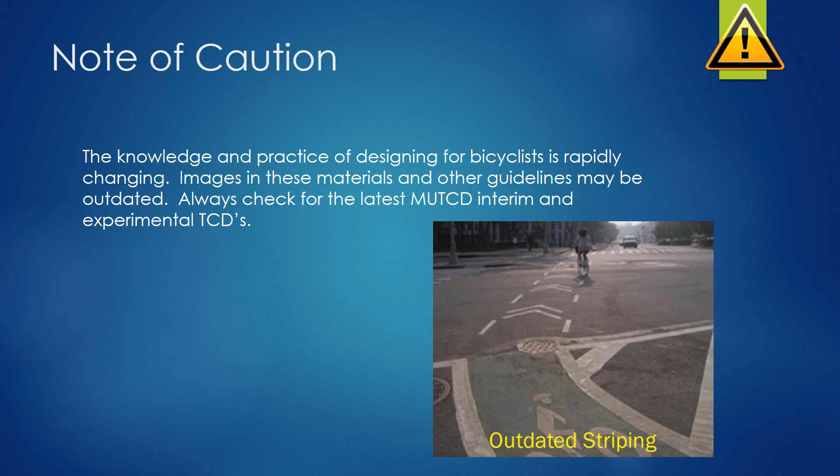I also want to remind you of some of the concepts that we discussed in our previous webinars. These key safety factors for designing for bicyclist safety: speed, number of lanes, visibility, the type of traffic, how much traffic there is, how many large trucks are traveling on that roadway, where the conflict points are, how close the bicyclist is to moving motor vehicles, the pavement condition, how well the bicyclists control the vehicle, or even if there's grade or turning maneuvers that might make it difficult for a bicyclist to maintain control, and connectivity of an overall network. And many of these factors are going to be very critical to designing for bicyclists at intersections.

Certainly, if we can reduce speed, that reduces the risk of a severe crash. Number of lanes makes an intersection very complicated for a bicyclist to maneuver through. Visibility is probably where we have the most opportunity in terms of countermeasures, trying to make the bicyclist more conspicuous to motorists and trying to make those conflict points more conspicuous. And certainly conflict points at intersections are a key concern.

We're going to start off with what you might not usually think of as an intersection, but a shared use path crossing of a street would be a form of intersection. And we want to be thinking about pedestrians and bicyclists at these locations.

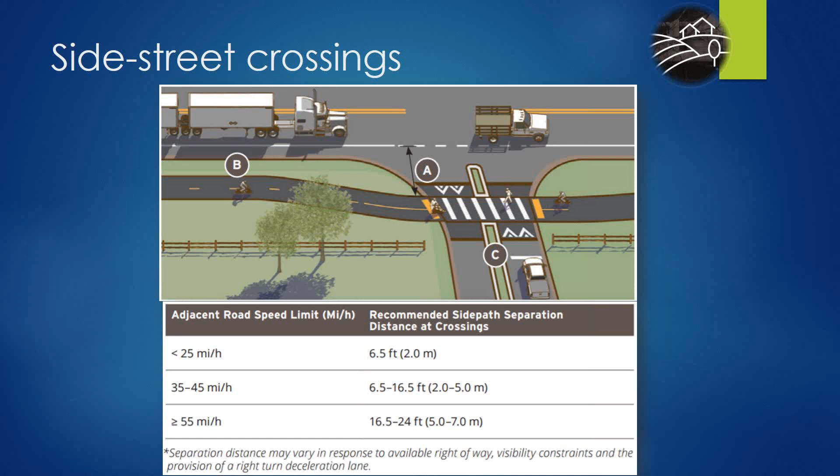So in terms of designing a shared use path crossing, there's a cycle we go through. First, we look at the geometric alignment and terrain considerations. Is it a 90-degree crossing? Is it skewed? Are there grades we have to contend with? What can we do to improve that?

Then there's the roadway characteristics: how many lanes, what are the speeds, what are the volumes. And then we want to check the sight triangles, the visibility. A bicyclist will be approaching that crossing anywhere from 10 to 20 miles per hour, or slower if they're yielding or looking for traffic. So we want to carefully consider the sight triangle for both pedestrians and bicyclists.

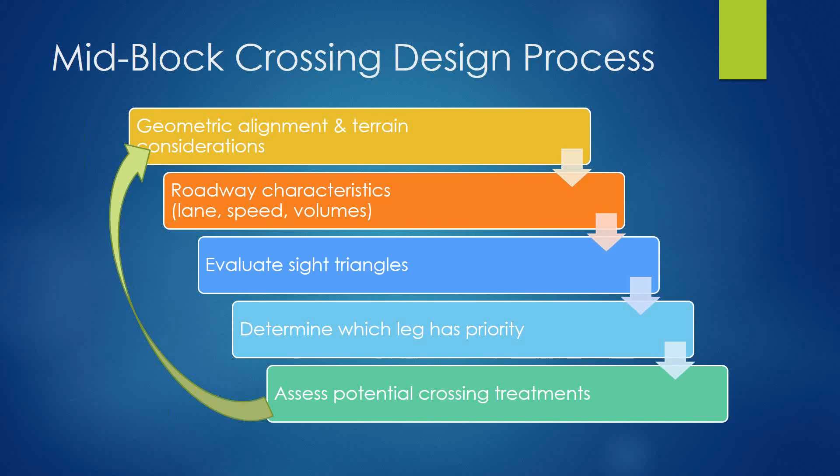At that point, we determine which leg of the intersection, or whether the shared use path or the street, is yielding at this crossing. Then we can look at potential treatments to enhance the safety and visibility of that crossing, and we might iterate through this process a couple of times, going back and forth to refine our design.

Here's one example using yield signs. You could do a similar layout with stop signs, but here we have the path yielding to the roadway, with an advance warning sign for the bicyclist that they should yield ahead, and a yield sign. I'll also point out they have a street name sign. Very often we forget about putting street name signs for bicyclists on a shared use path, or street name signs giving information in both directions even though the street might be one way, because pedestrians and bicyclists might be traveling opposite to motor vehicle traffic.

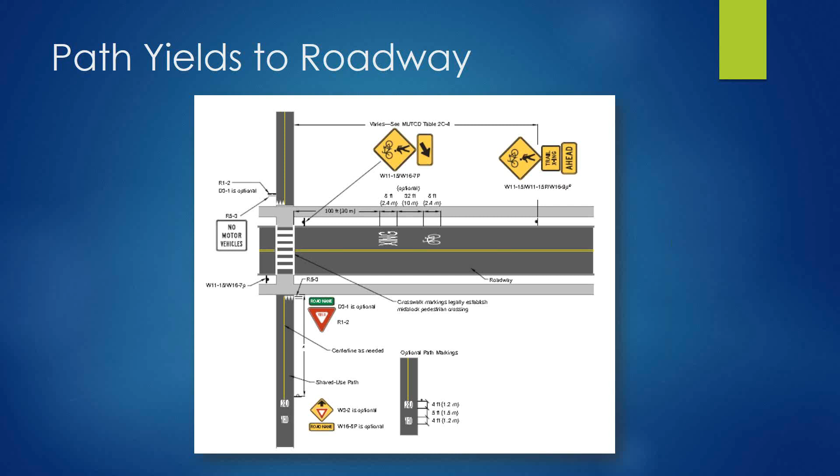So street name signs are important. And then you notice on the roadway, we have a warning for the pedestrian crossing ahead, or the shared use path crossing ahead, and then there's a shared use crossing sign right at the crosswalk.

Alternatively, if we're asking motorists to yield to pedestrians and bicyclists, we can have the yield warning ahead sign, the yield sign at the intersection, the shark's teeth, or we could have a stop sign and a stop bar. And for the bicyclists, we have a warning sign indicating a crossing ahead, so they might choose to slow down and be cautious to make sure motorists are truly yielding for them.

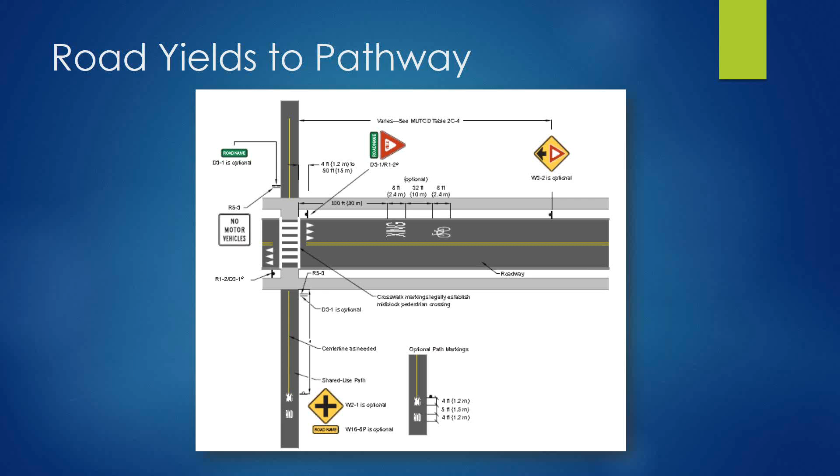Once we've figured out who's yielding to whom, the geometry, and the sight triangles, we can look at additional countermeasures to improve safety, like the advanced warning signs and stop bars we've mentioned. If we have multiple lanes approaching the crossing, we probably want an advanced stop bar instead of placing it immediately at the crosswalk, because this allows the bicyclist or pedestrian to better see that both lanes of traffic have yielded or stopped, rather than having the first car stopped and blocking their view of what's happening in the adjacent lane.

We can also have a raised crossing, or add some beacons or lights to improve the yielding behavior, like a rectangular rapid flashing beacon or a pedestrian hybrid beacon.

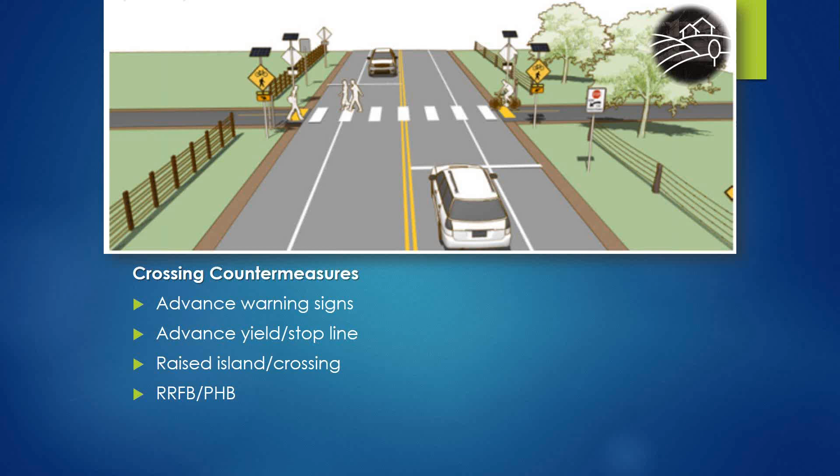So here's an example again from the Small Towns and Rural Multimodal Network Guide, where they've used a raised crossing. They've put some warning signs, and they're asking motorists to yield to the people using the trail.

There might be some things you'd want to refine if you were trying this in your own location, some things we've learned from this installation. But this is a good example of taking traffic control devices we already have and refining them to improve the situation for a bicyclist.

Let's move on to what we typically think of as an intersection and how we might think about bicyclists at those intersections. When I started my career as a designer, I am saddened to admit that my consideration of pedestrians and bicyclists was very limited.

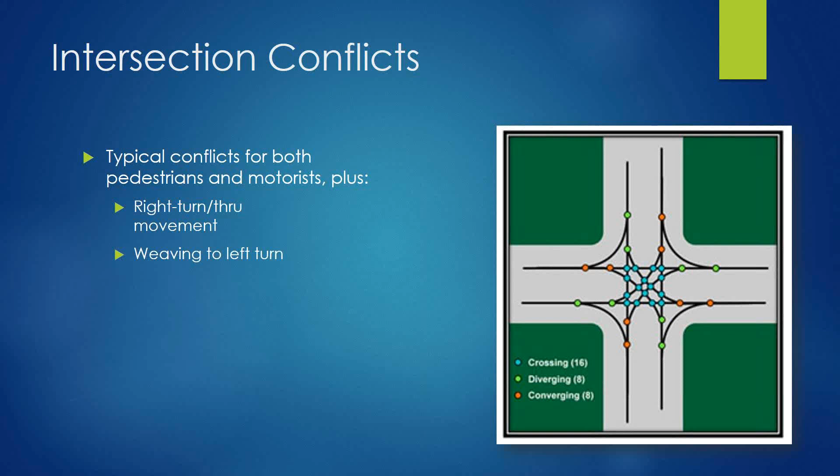We have something like 32 conflict points at a typical intersection for motor vehicles, and then there's all the conflict points that pedestrians experience. Well, bicyclists have all of the conflict points of a motorist and of a pedestrian, as well as 2 additional conflict points, the right turn through movement conflict and the weaving to a left turn conflict.

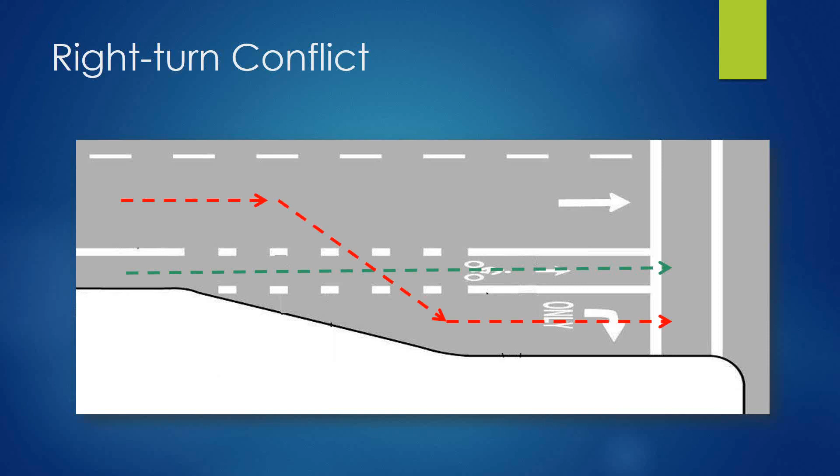So here we have a typical intersection with an auxiliary right turn lane, and the bicyclist would be traveling straight through the intersection. And if there's a motor vehicle approaching, they are crossing the path of the bicyclist, or the bicyclist is crossing the path of the motorist, creating that right turn conflict point.

In this case, we have, as I think you refer to them in Florida, a keyway, where the bicyclist has space between the right turn and the through movement motor vehicle lanes. And that should simplify the maneuvers, where the motorist is crossing the bike lane and looking at that conflict at a time that's separate from when they are looking for gaps in traffic and making a right turn maneuver.

And so this is certainly a preferred layout for that right turn conflict, but we don't always have the space available to us, and or we might have some other type of intersection arrangements where it's more difficult to accommodate bicyclists.

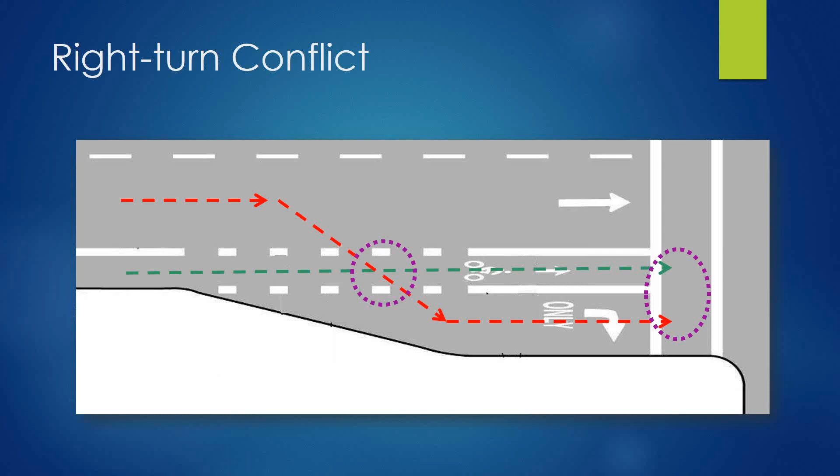So I want you to be thinking like a bicyclist when you look at your intersection designs. Put yourself on their pedals, so to speak, and ask yourself, would you dare, or would you allow your children to travel through an intersection on a bicycle the way that you have accommodated them?

Here we've got a young lady who is approaching an intersection. The motor vehicle lane that's closest to her is going to become a right turn only lane at the intersection. So at some point, she has to merge across that right turn lane to get over into or near the through lane. As she's approaching the intersection, she looks over her left shoulder, trying to find gaps in traffic. Fortunately, there's no one approaching in that right turn lane because the traffic is moving pretty rapidly on this corridor, running at about 40, 45 miles per hour.

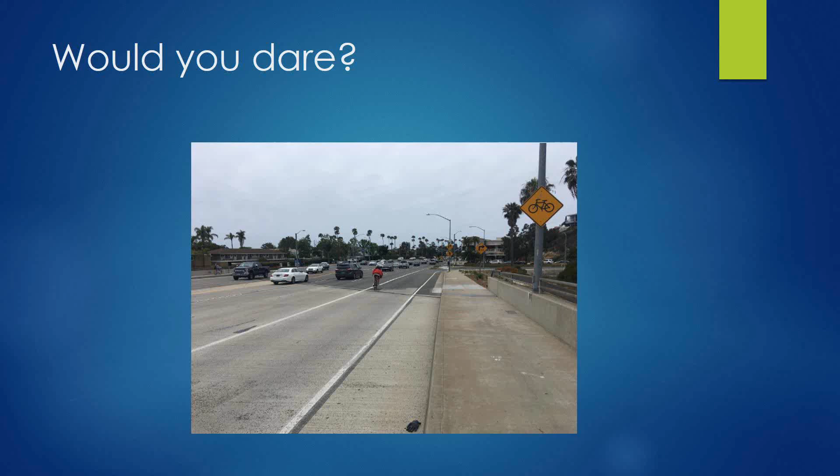So if we want to think about providing safer intersections for bicyclists, let's talk about some of the countermeasures we can implement. First off, I want to speak to signalized intersections and the timing and features of those signals. Some of the things we can do are adjust the initial and gap times so that they're appropriate for bicyclists, provide detection that differentiates bicyclists from other things we're detecting at intersections, and provide something like a leading bicyclist interval or segregate the conflicting movements.

First off, I'd like to mention that the MUTCD does have a standard that, even in a small way, addresses bikeways. In section 9D.02, it says: on bikeways, signal timing and actuation shall be reviewed and adjusted to consider the needs of bicyclists. Now, there might be some room or gray area on this one.

First of all, what's a bikeway? Different people may interpret that different ways, but I would argue if bicyclists are legal on your corridor, or if you have a presence of bicyclists using that corridor, this would certainly apply. Or if you have actual explicit bikeway features, like a bike lane, whether it's being used or not, you might ask yourself, why is it not being used? Maybe it's because people are uncomfortable at the intersection. If you have those bikeway features, this standard should apply.

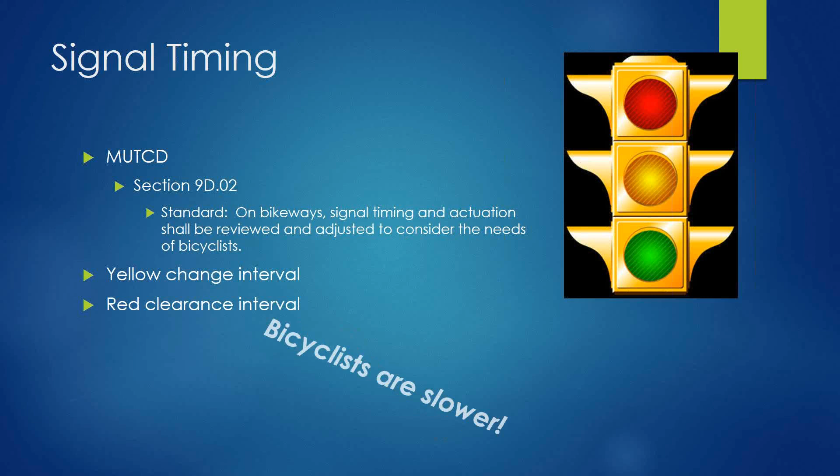Just remember, bicyclists are slower. They don't start up as fast. It takes a little more to get going, and they are not moving as fast as motor vehicles. The AASHTO Bike Guide has information on appropriate speeds and estimates for the time necessary for a bicyclist to cross the intersection.

Some of the other features we can add relate to bicycle detection, and there are a number of options available. Certainly buttons, loops, video detection, microwave, radar, and infrared have all been used.

We can add detection in the bike lane. We could even add essentially a dilemma zone detector. If we see a bicyclist approaching the intersection, we could extend that yellow time or green time just at those times when bicyclists are present, thereby maintaining the operational efficiency of the intersection. By having very good detection, we only need to take that time away from motorists when bicycles are present and using it. So if maintaining operations is a concern, which it usually is, we can find a balance by using these detection devices.

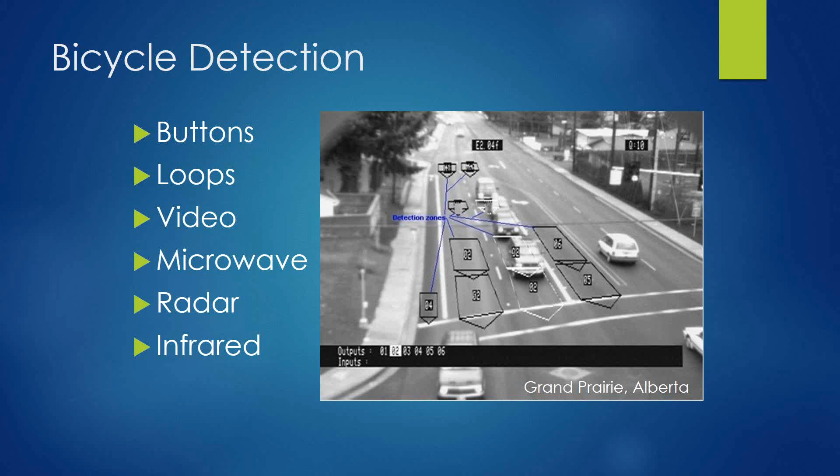Just an example: on the left we have a pedestrian button, which is not going to be terribly useful for a bicyclist. They are going to have to get up over the curb, over to the sidewalk to reach that button, which is uncomfortable and difficult. And depending on the placement of the button, it might put them in a very inconspicuous spot so that when they're ready to ride across the intersection, they're at risk of being hit by a motorist who is turning right.

Sometimes we have put push buttons close to the curb so bicycles can reach that, but we have to also weigh how that interacts with that auxiliary right turn lane. If the bicyclist is in a keyway, they're not going to be able to reach that button. Or if the bicyclist is making a left turn, that button is not going to be useful to them either. So being thoughtful about that, this might be the least helpful form of detection, but it is better than nothing.

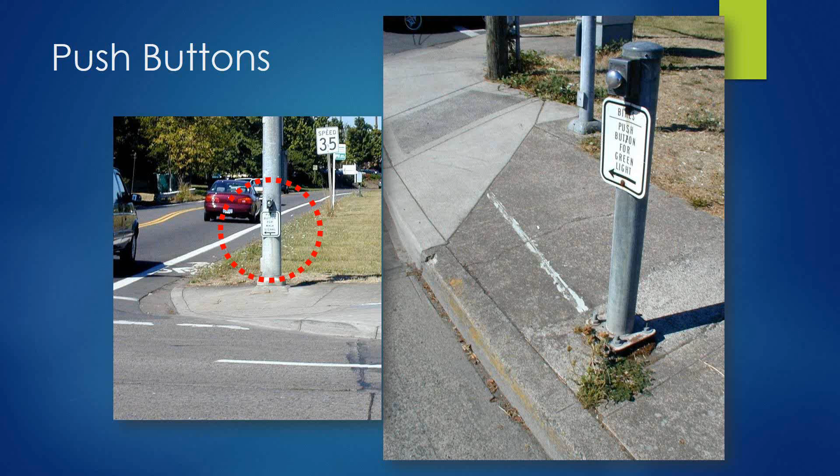We can also use loops for bicyclists. There are some recommendations on the different loops that are most effective for bicyclists. That diagonal one on the far right is the best for detecting a bicyclist, but it's also important that the bicyclist be lined up appropriately for the loop to pick them up. And a bicyclist is not going to know that, particularly if there's been an overlay. Since those loops are put in, they won't even know that they're there or what they're for.

We can use a pavement message, as you can see in the photo, to indicate to a bicyclist where they should be so that the loop will pick them up. But it would also be helpful to add some information or education so that they know how to use that device.

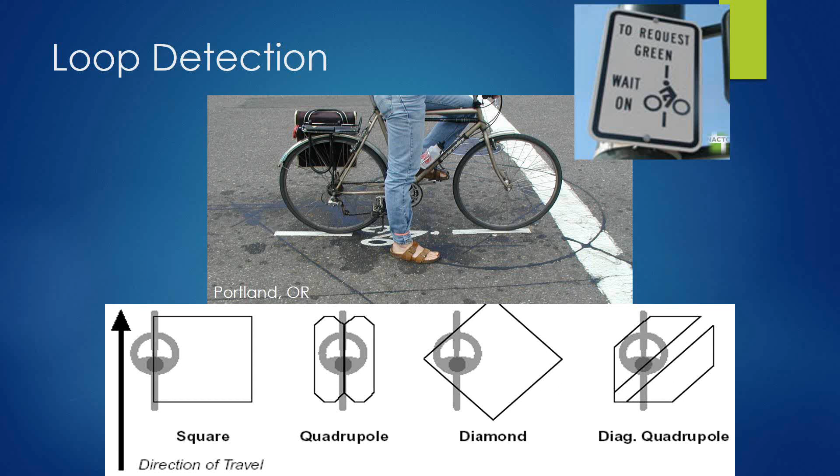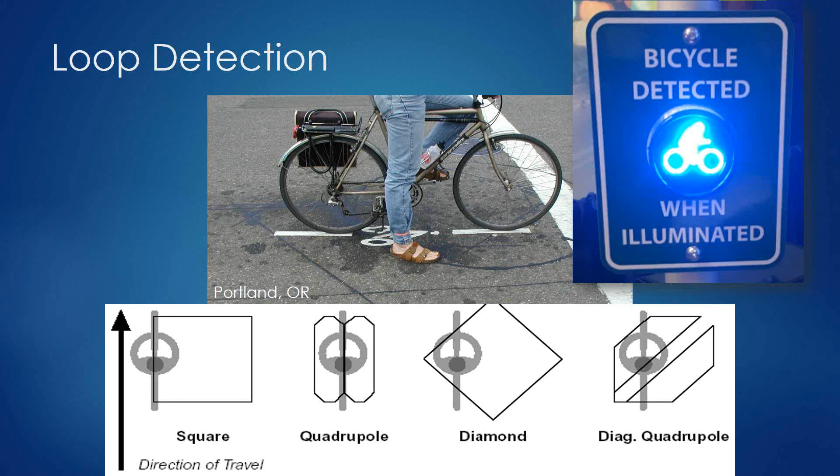Recently at a conference, I saw some vendors experimenting with other devices. This would be useful for loops, but also for things like passive detection, where you can turn on an indication for the bicyclist to let them know that, yes, you have been detected, to give them feedback and reassurance that the light will change for them. And yes, it would be good for them to wait for the light to change because there will be time for them.

As I mentioned with the passive detection, there are a lot of options that are getting better all the time. And very often there are arguments that it's not working, it's not picking up bikes, but that has a lot to do with the sensitivity of those detection devices and how well they're adjusted to actually pick up the bikes.

We'd want to consider, in this scenario, the bicyclist might need to move over to that left turn lane to make a left turn maneuver. Or if we have something like a two-stage turn box, which we'll talk about later, having detection lined up to pick up bicyclists who are waiting to make a left turn in those scenarios.

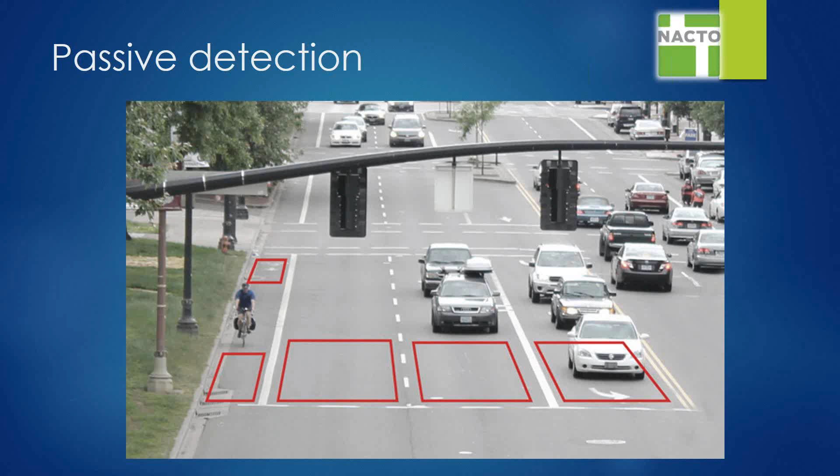This can be supplemented with a no right turn on red, or even a dynamic no right turn on red, so that those right turning vehicles are explicitly stopping and allowing pedestrians or bicyclists who may be using the crosswalk to get into that space and across the intersection.

This can be adapted very simply by adding a sign that says bikes use PED signal. So if we're using leading pedestrian intervals, I would recommend giving the bicyclist the head start as well.

And very often you'll see experienced bicyclists, as they approach an intersection where the light is stopped, they'll move to the front of the queue so that they can get across the intersection and have plenty of time to do that before the light changes again. And that puts them in a more visible position so the right turners don't get to them. And if they're watching those PED signals, they will very often go with the PED signal anyway. So let's give them the permission to do so.

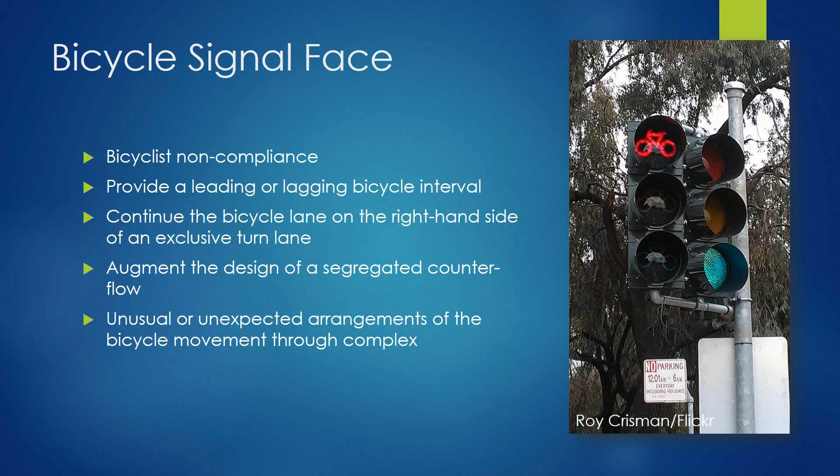The poll question is up on the screen. Only those traffic control devices shown in the current edition of the MUTCD may be used. True or false?

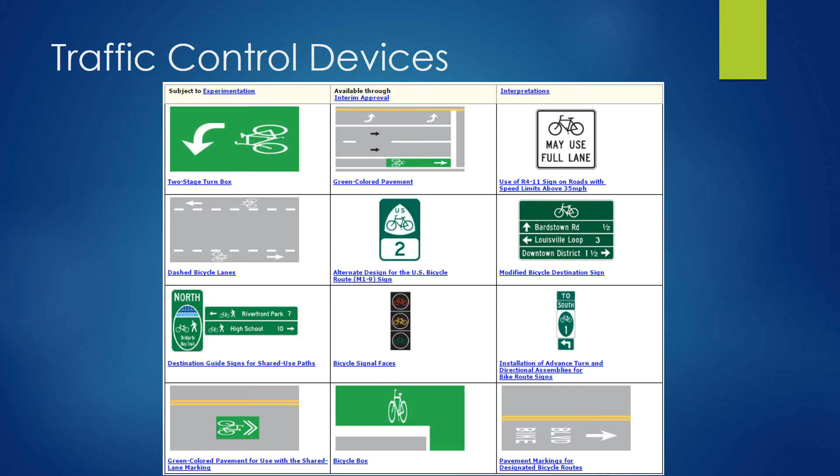So we're going to talk about some of these countermeasures and traffic control devices that we can apply at intersections. First off, if we're using our shoulders as our bikeway, we may want to rethink what we do at the intersections, because the shoulder is not a travel lane ordinarily. It is space that is available for the bicyclist, letting them get out of the through travel lanes, but often those shoulders disappear when we get to the intersection.

So we can simply do some modifications to the shoulder striping, or it's an opportunity -- instead of the example I mentioned before where the bike lane ended at every intersection and picked up on the far side, maybe we add a bike lane only at the intersections and let people use the shoulder once they get beyond those difficult locations. Thinking about where the risks are, that makes more sense. So adding bike lanes through the intersections, or simply adding some shared lane markings to highlight the conflicts, and let bicyclists know what they're meant to do as they approach the intersection.

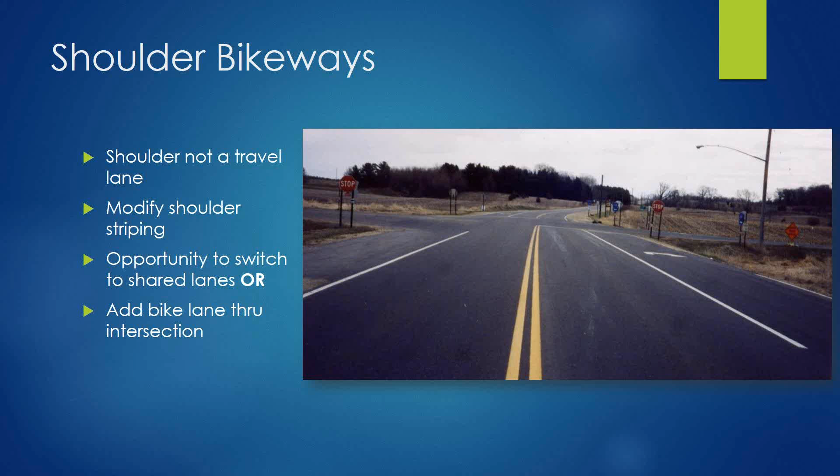Here's an example of something very simple we can do for the shoulder striping to improve conditions for bicyclists. This is an image we may see in the next edition of the AASHTO Bike Guide, so look forward to that coming out in the near future. Here we see typical shoulder striping at a rural intersection, where it essentially disappears as you get to the intersection and the bicyclist is left to fend for themselves.

We can simply make a few changes to that striping. For the bicyclist traveling from the bottom to the top of the screen, you can see that the shoulder stripe changed from a solid line to a dashed line and carried all the way to the intersection. Then they jogged over and carried an edge line around that radius so they continue to provide the edge lining needed at the intersection.

On the far side of the intersection, that dashed line picks up again and then becomes a solid line as it continues past the intersection and becomes the shoulder. You can see where that edge line continues around the radius and then jogs over for that solid shoulder line. And if we really wanted to emphasize bicycle travel at the intersection, we could carry that shoulder line as a dashed line through the intersection to provide a little extra guidance for bicyclists and motorists, highlighting that potential conflict. This would be essentially a free countermeasure.

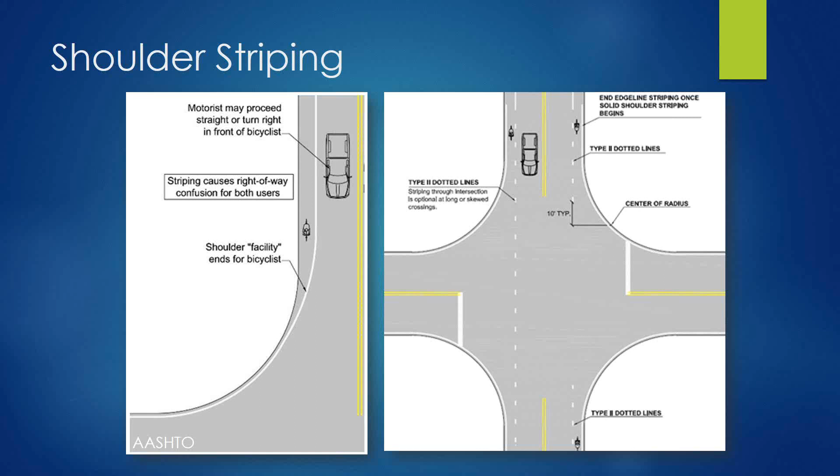For roadways that have shared lane markings or are a shared roadway, you may have more than the rightmost lane that is now a shared lane. Any or all of the lanes at the intersections could be a shared lane, so you might need to add some additional shared lane markings at the intersection, as well as the detection that would go along with those, so that bicyclists can navigate those intersections.

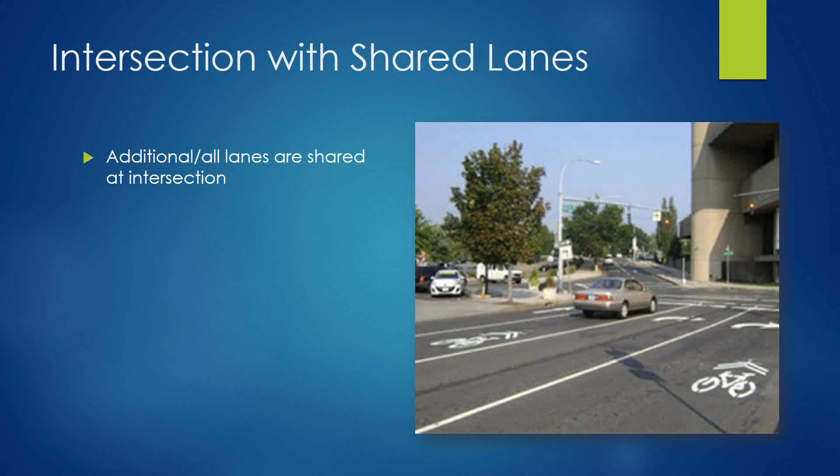Here we have another image from the Small Town and Rural Multimodal Network Guide, where they have carried the bike lane across that side street crossing, but they've used dashed lines instead of a solid line to further emphasize for bicyclists and motorists that this is a conflict point and hopefully make them more aware. This could be supplemented with the pictured sign, turning vehicles yield to bicyclists.

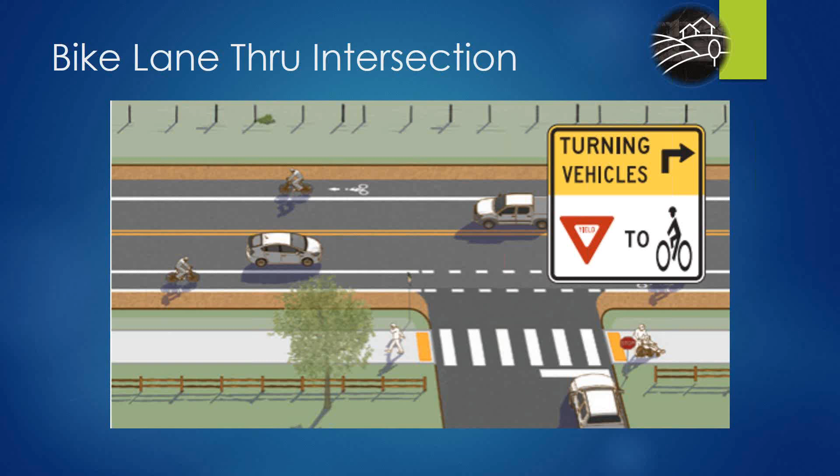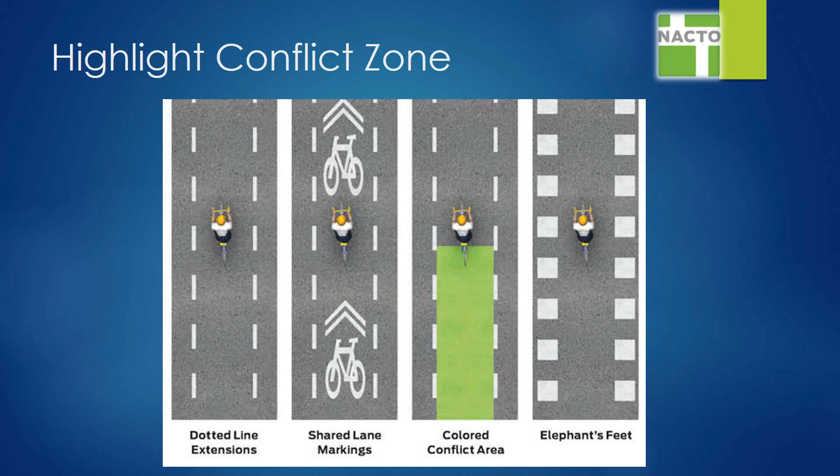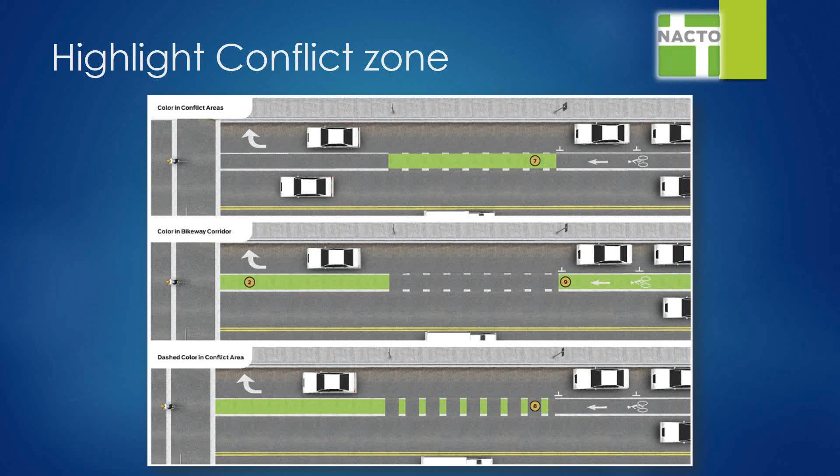But you could also add a sharrow in that space where the bicyclist is going to need to take the lane to get through the intersection. You could even highlight that sharrow further, or shared lane marking, with a green-backed sharrow or green-backed shared lane marking.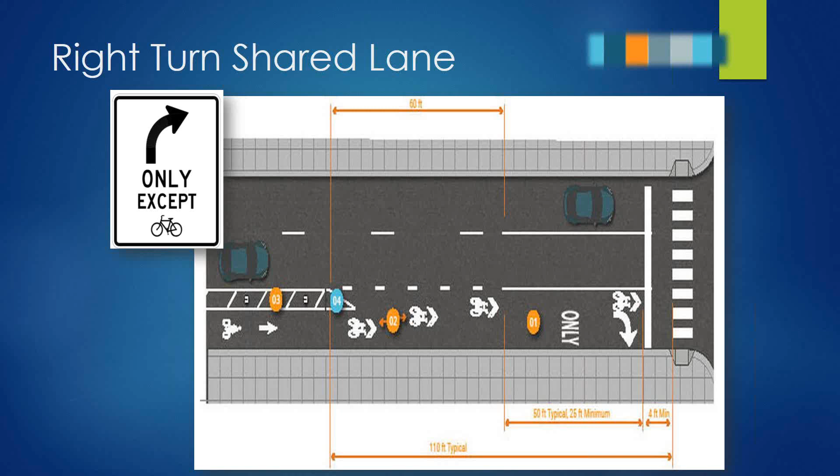Here's an example from Minnesota where you can see the positioning of the sharrows relative to the right turn arrow. They've got them all established in the center of the lane. They have put a sharrow, then the arrow, then the sharrow. And I would add to this that right turn only except bicyclists.

So some of the elements necessary for that 2-stage left turn queue box. You want to have the bicycle symbol, a turn or through arrow as appropriate. If the bicycle box is in a position that it's in conflict with those right turn maneuvers, you're certainly going to want to have a right turn on red prohibition. And you'll absolutely need to have passive detection to pick up those bicyclists in that bike box if that maneuver is not on automatic recall.

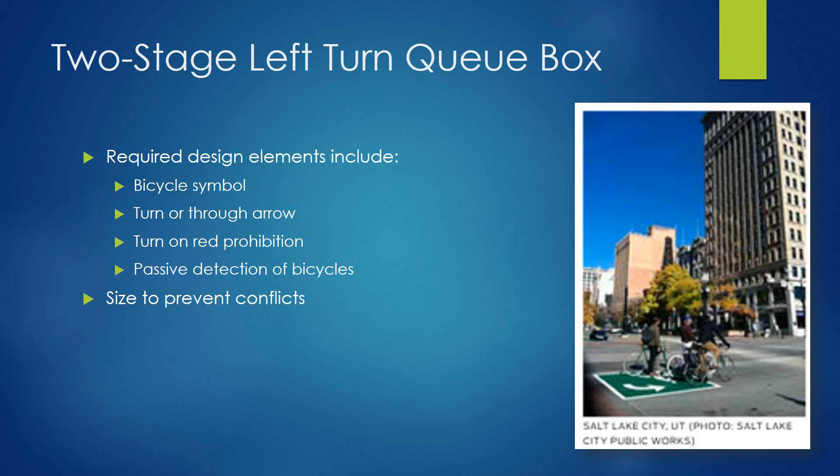And let me just correct myself on that. I refer to it as a bike box. It's a 2-stage turn box. This is what we refer to as the bike box. And the terminology can get us sometimes because what we call the bike box is not actually square, and what we call the 2-stage turn box is square like a box. So be careful with your terminology. It's easy to slip up.

The concept with the bike box is that it gives bicyclists an opportunity to get to the front of the intersection. So when the light turns red, particularly if you have a number of bicyclists who in a typical bike lane would be lined up at the back, they might have difficulty getting all the way through the intersection during the green time. It also provides an opportunity for that left turn maneuver. When the light's red, the bicyclist can move over to the left part of the bike box and wait for the light to change and then make their left turn. It also sort of groups all those bicyclists together. If there's a number of them traveling through the intersection, it gets them firmly established in a visible condition so that they're not at risk of those right turn maneuvers.

So it increases visibility, it reduces signal delay for bicyclists because they're at the front of the intersection when the light changes. They're well positioned for that left turn. It reduces the risk of right hooks, except when the light has just changed. And it groups those bicyclists to hopefully improve operations overall.

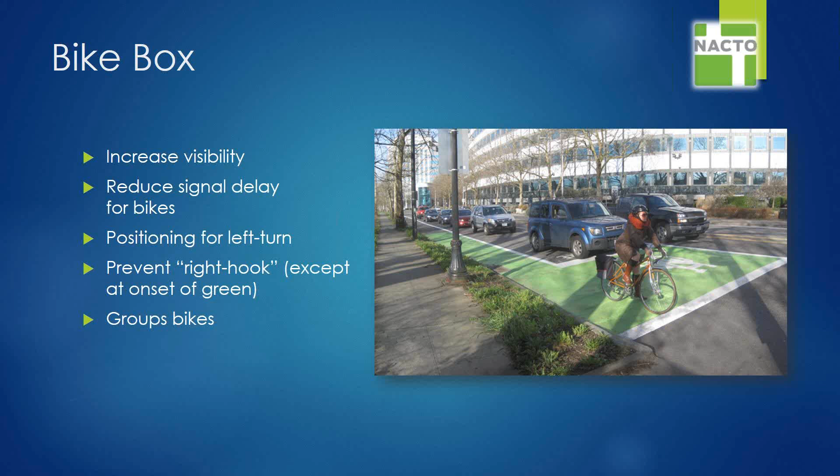The required elements - I'd refer you to the interim approval on that website I showed you - this image is from NACTO, so there's some variation, but you have to have the advance stop bar, the bike symbol in the bike box, right turn on red prohibited unless you have an auxiliary lane to the right of the bike box. You need some setback from the crosswalk, a countdown pedestrian signal. This lets bicyclists know they can look left or right and see if there's enough time to move into the bike box before the light changes, and the appropriate yellow change and red clearance intervals.

The other thing I'd add is we don't want to make those bike boxes too short, because on the bike it might be hard to turn left, maneuver and straighten up. You're essentially having to almost walk the bike into position. So be thoughtful about how stingy you are with the space you're providing for the bicyclist.

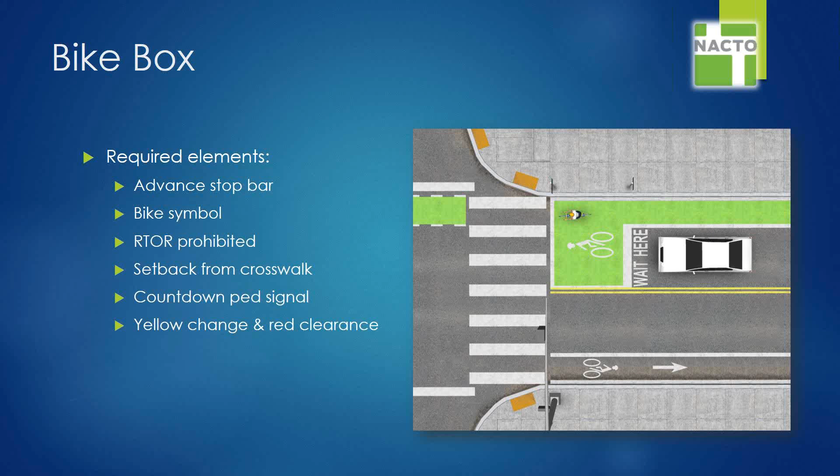So those are some of the countermeasures we can use at three-legged and four-legged typical intersections. Now let's talk about bicyclists at roundabouts and how roundabouts are designed for bicyclists. Roundabouts work well for bicyclists because of the nature of a well-designed roundabout - it slows the speed using deflection angles and truck aprons. You never, ever want to put a bike lane in the circular part of a roundabout intersection, because we don't want motorists passing bicyclists in that intersection.

Roundabouts are usually simple for bicyclists, especially a single lane roundabout. The splitter islands give them a little more comfort and space from moving traffic. We also want to provide bike ramps for people not comfortable taking the lane or using a shared lane, giving them the opportunity to get onto the sidewalk. We want to think of that sidewalk around the circular portion of the intersection as a shared use path, giving a little more space than a typical sidewalk.

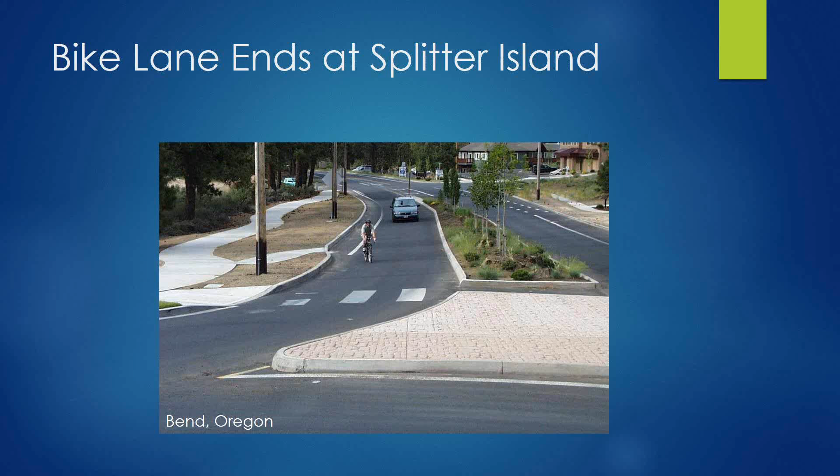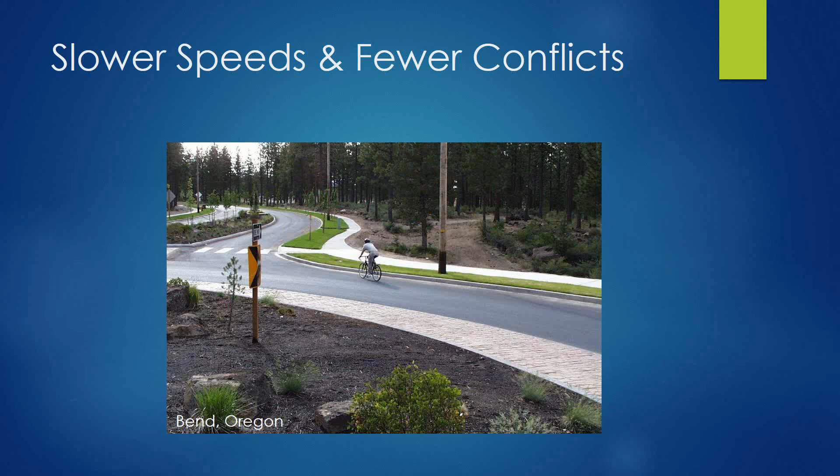Here we can see a bicyclist approaching the roundabout. The bike lane has ended and he's moving into the motor vehicle lane. The speeds are slower, so it's a much more comfortable maneuver here than at a typical intersection. The bicyclist is maneuvering around the rotary, taking the lane, firmly establishing himself in traffic in a visible location. This gentleman continues around the roundabout and is about to exit. Here on the exit, the bike lane picks up again and the bicyclist moves into it.

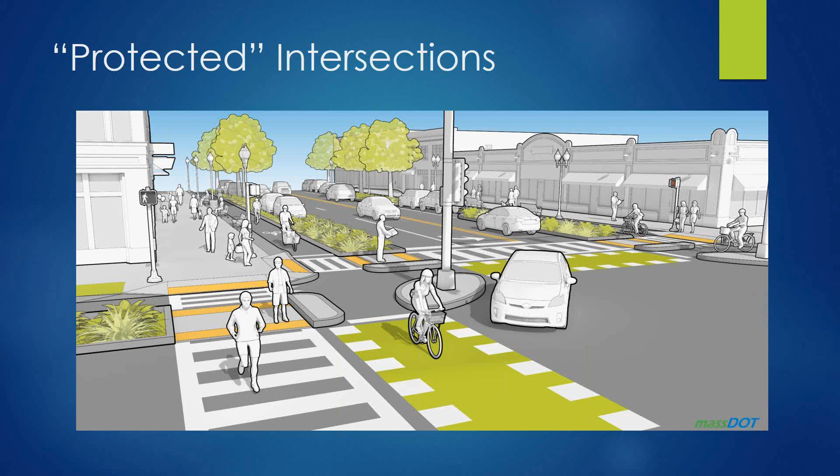Now we have another type of intersection that is emerging. It started with 5 locations across the country, but more and more are being developed all the time, and in a lot of locations they're adding features of a protected intersection - maybe not a fully protected intersection, but certain features that make it more protected. I use the term 'protected' in quotes because that can cause liability issues - if you have guidance for a protected intersection and didn't install it fully, that implies you left it unprotected or unsafe, and we don't want to imply that. We haven't really developed another term for these types of intersections.

In this image, you can see some elements of a protected intersection: a separated bike lane approaching the intersection, well-defined space for pedestrians and bicyclists, and channelizing islands to slow down motor vehicle traffic and position motorists so they have a better view of the conflict points as they approach them.

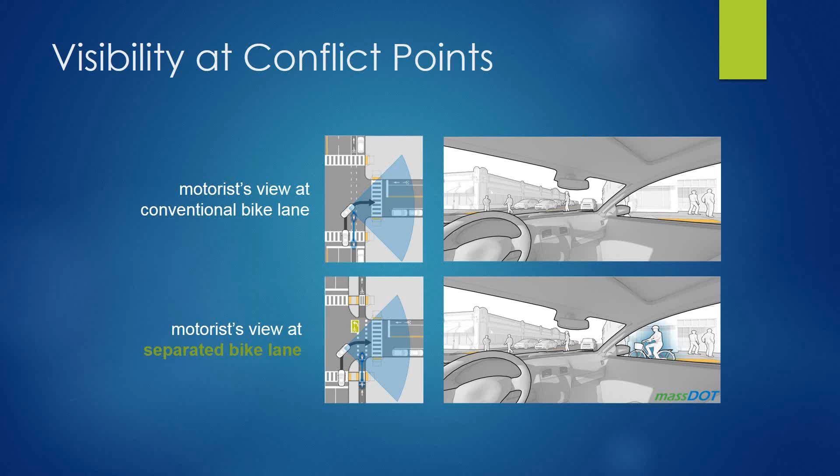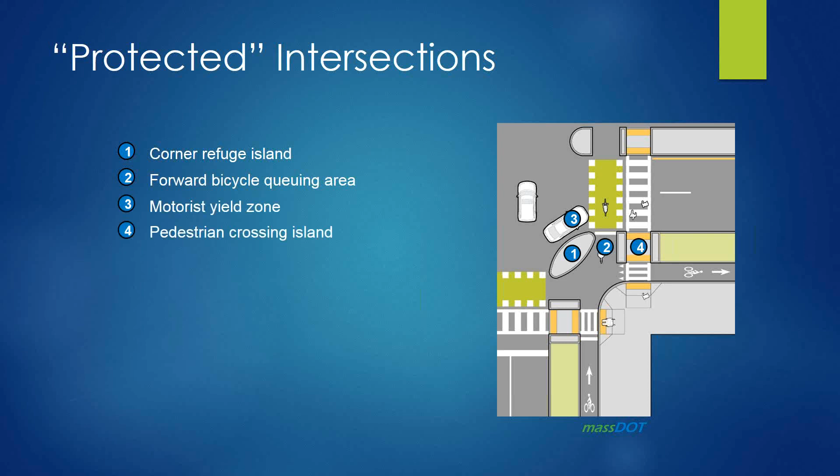We have a pedestrian crossing of the separated bike lane, and we want to remember that that is a traffic lane, so we need detectable warnings for pedestrians so that they know that they're crossing a conflict zone. We have a pedestrian curb ramp, and let's go back to that image for a moment.

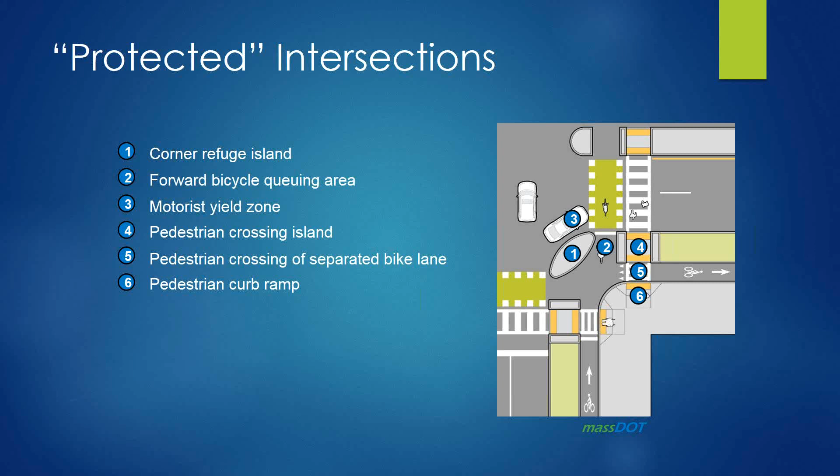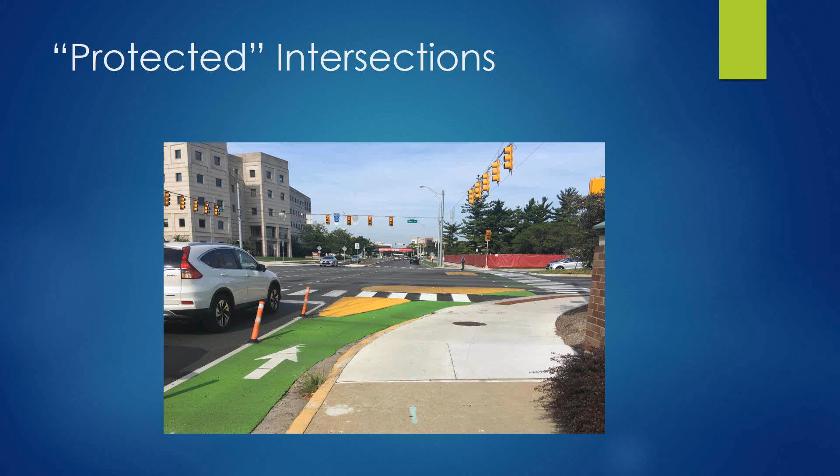So those are the key features, but any of those features can be adapted and used in different ways at different intersections. This is a photo that I took in Indianapolis, where on the approach, we have a typical bike lane, but on the far side of the intersection, it's more of a separated bike lane where it is to the right of the park strip, adjacent to the sidewalk. And so they've used some of these channelizing islands to help with the transition, but in essence, they've also created sort of a protected corner on this intersection where motorists, as they're making a right turn, are going to be well positioned to view pedestrians and bicyclists who are crossing the intersection.

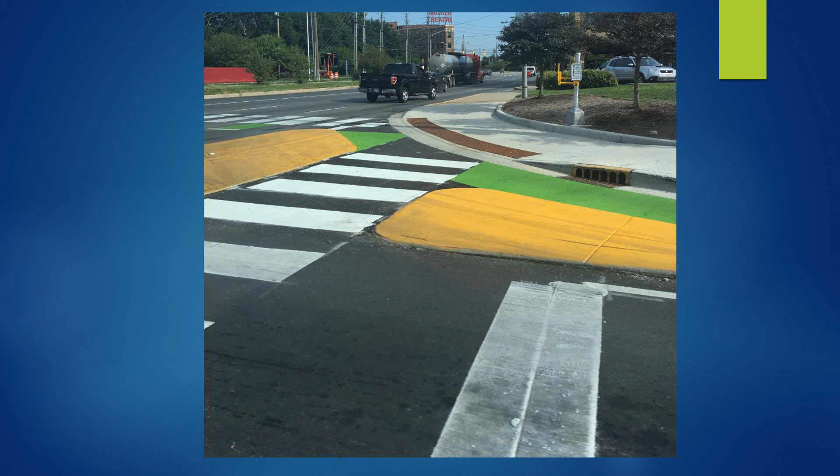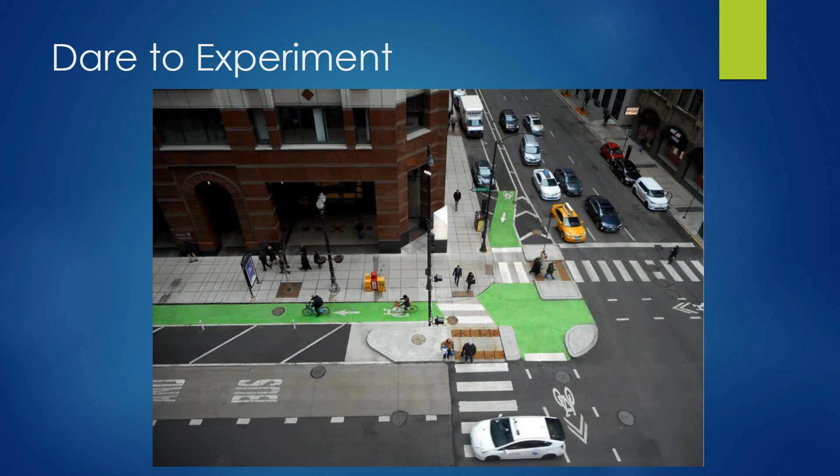So we have all those elements. We've got the corner refuge island, we have the pedestrian refuge, we've got the queuing area for the bicyclists. And this looks like a really good plan. And this is what it looked like when they implemented it. You can see how much pedestrian and bicycle travel they have. And they were really pleased with it, but they did find that they had a few problems with implementation.

Some of the motorists were getting a little confused and thinking that this was an auxiliary right turn lane, and they were pulling into this bikeway and causing a few problems. But they didn't decide that this was a failure and rip it out. They tweaked it a little bit.

So I would encourage you to dare to experiment. Try these things out. Don't be afraid if they don't work perfectly the first time you implement them, and be prepared to make a few tweaks, because ultimately what we're getting is a much better design for bicyclists.

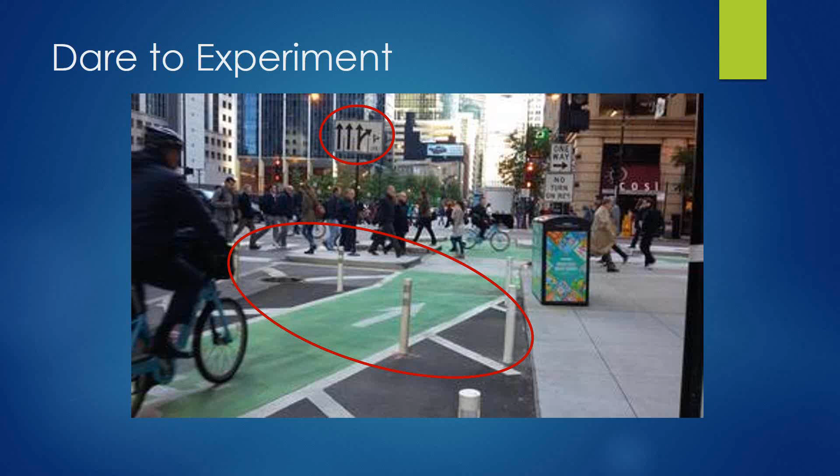And a few other thoughts. Adapt what you already have so that it is functioning well for bicyclists. Take a look at your intersections. I stood at a lot of intersections with my watch and counted just a few seconds, and if a bicyclist was approaching that stale green, they wouldn't be able to get through the intersection in time. But that can be quickly changed.

So thinking about signal timing, or changing our shoulder striping markings, or adding some enhanced markings to make those conflict points conspicuous, or even adding a turning vehicles yield to bicyclists sign. And then adding specific features for bicyclists: passive detection, bike boxes or two-stage turn boxes, or channelizing islands to separate them more from motor vehicle travel.

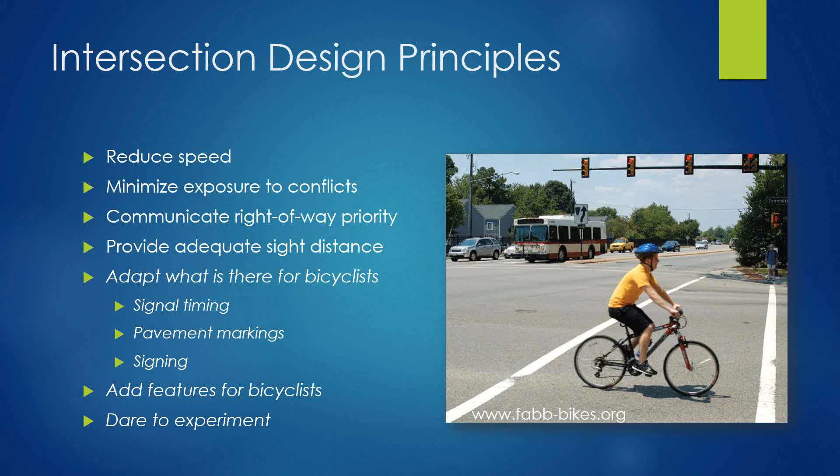Sure, we have a couple of questions that have come in the chat. The first one is regarding recumbents and handcycles. Are there any special design criteria or thought given to them because of their visibility, since they're lower than a typical bicycle, or is that just not really considered?

I think it can and should be considered. We certainly have some criteria in the AASHTO bike guide for different types of bicycles, although now that I think about it, I don't think they have the recumbent bicycle included. But if you have a number of people using recumbent bicycles, that's going to change your sight distance issues or your sight line issues, and it's something to be thoughtful about. Certainly a lot of the features we talked about, especially the protected intersection, I think is going to be beneficial for those recumbents. Another question that's emerging is, what do we do about skateboarders, scooters, and those other things as well?

They have almost the same eye height, a little bit different depending on what they're doing, but they might have some speed issues as well. Most of the time, skateboarders and scooter users are going to have a similar speed to bicyclists, so it seems like it's an appropriate usage for them to be in the bike lanes, but we just don't know a lot.

I chatted with a gentleman who had bicycle hand pedals and a tire attached to the front of his wheelchair. He indicated he's had some near misses and people nudging him because they weren't seeing him, since he sits lower. Imagine a van approaching a bicyclist like that and looking out their side window, not being able to see them. So maybe it's even an education issue for people using those shorter vehicles to make sure they have flags that stick up in the air to make themselves more visible.